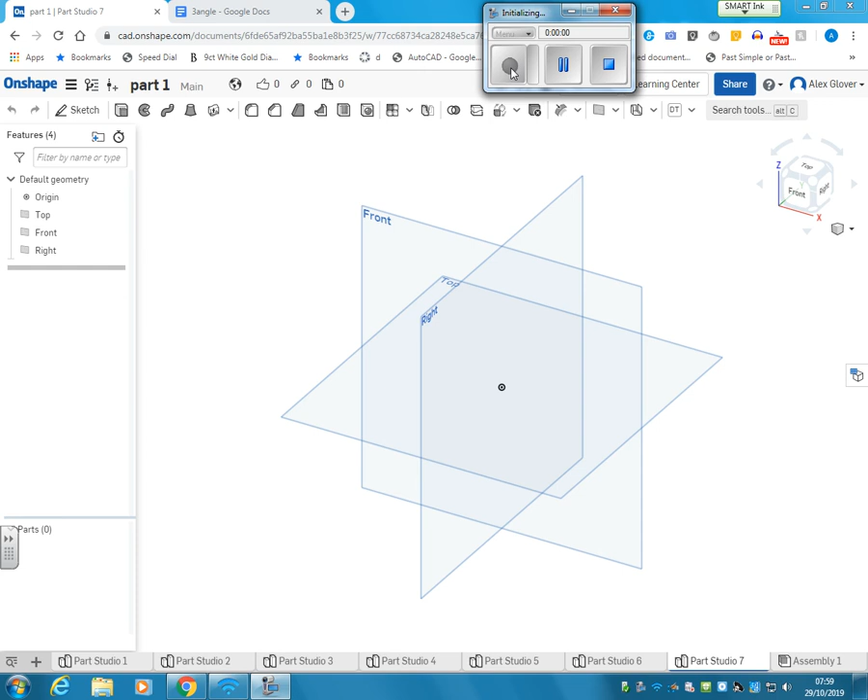Okay, so welcome to part 7. This is a bit more of a challenging part. First bit we're going to do is the slider plate at the bottom. This has constant cross section along a couple of ways, but it's probably got the most detail from the front view. So let's draw it from the front view.

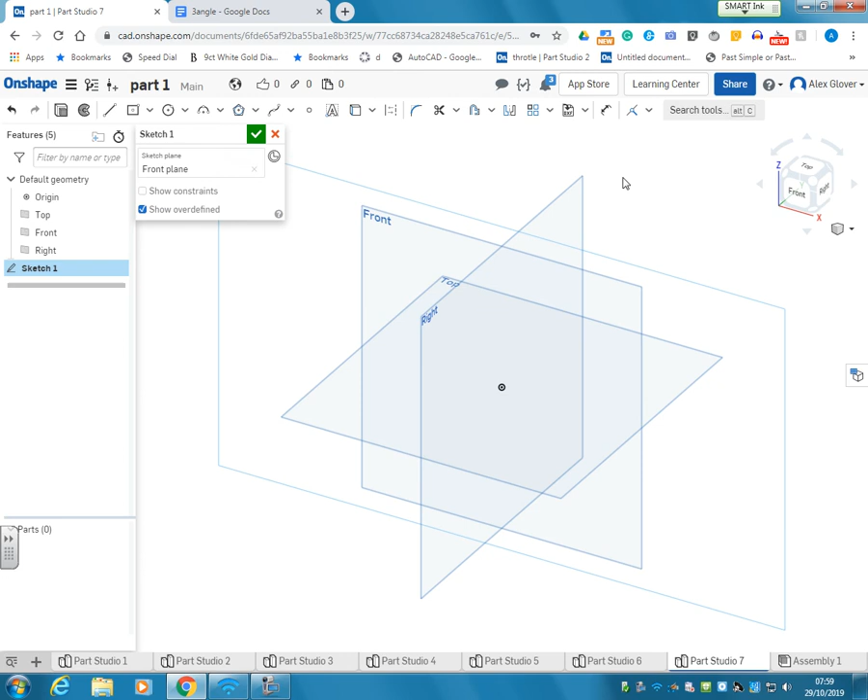We use this as a datum edge on the plane, and this has a line that is not symmetrical around the center, and then it has a circle here, with a diameter of 56, and then there's another circle inside because it's a hole, which is 34.

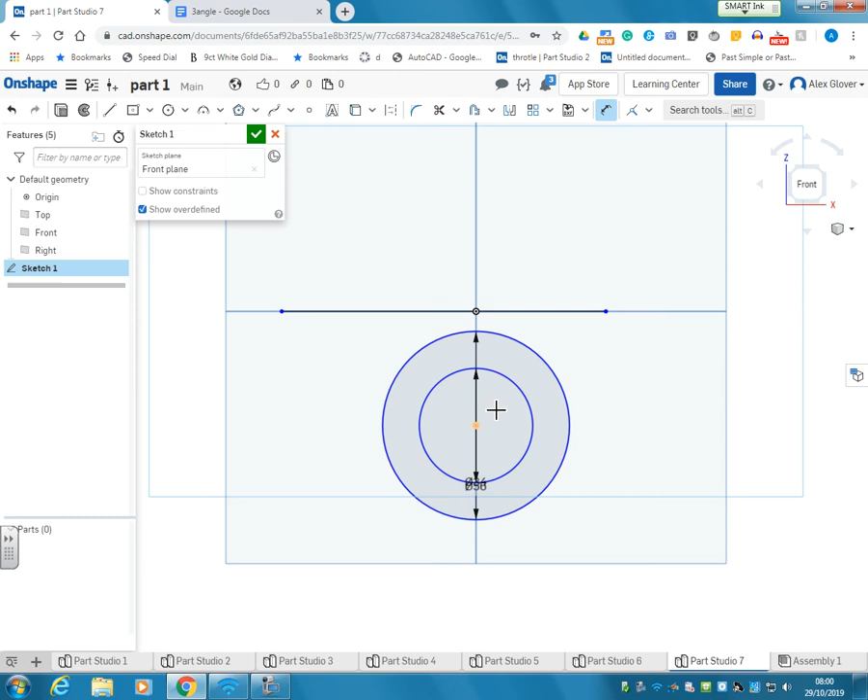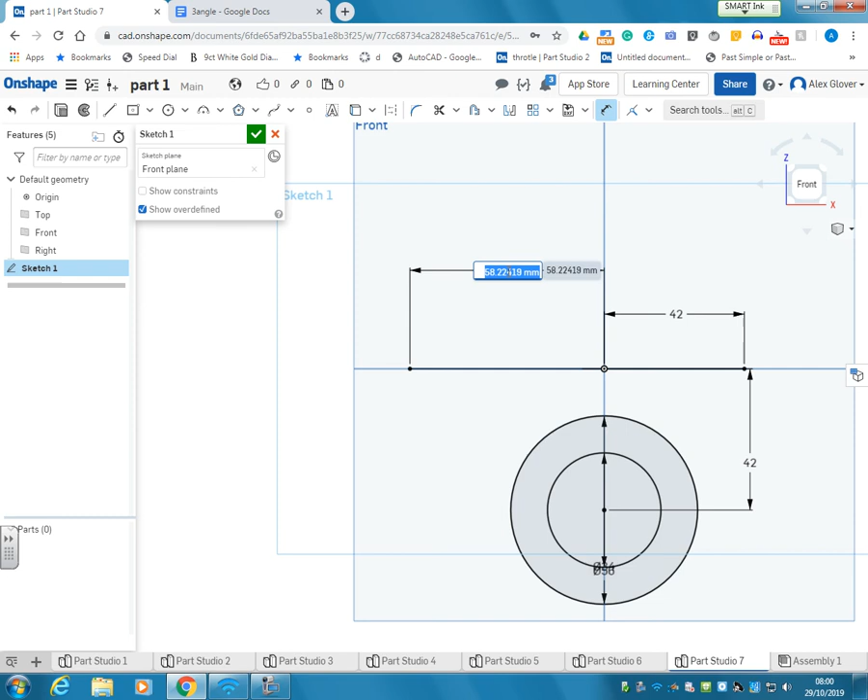Dimensioning that, 42. We also know that between there and there is 42, and that between here and the end point is 50 plus 73, which is 123. We know they link, and they have tangency.

And snip away the bits we don't need. Oops, that's wrong. I've missed a couple of edges bits out there.

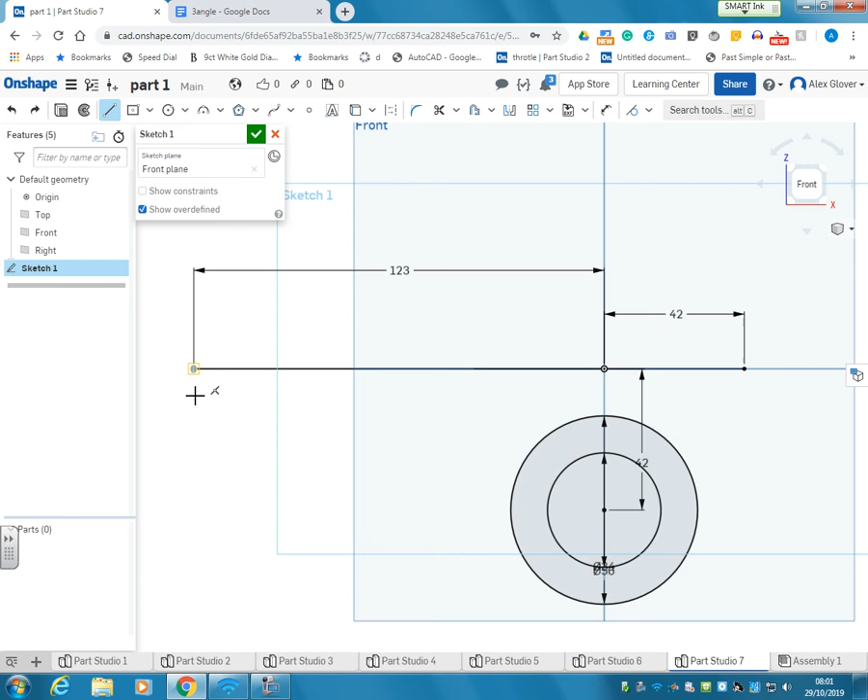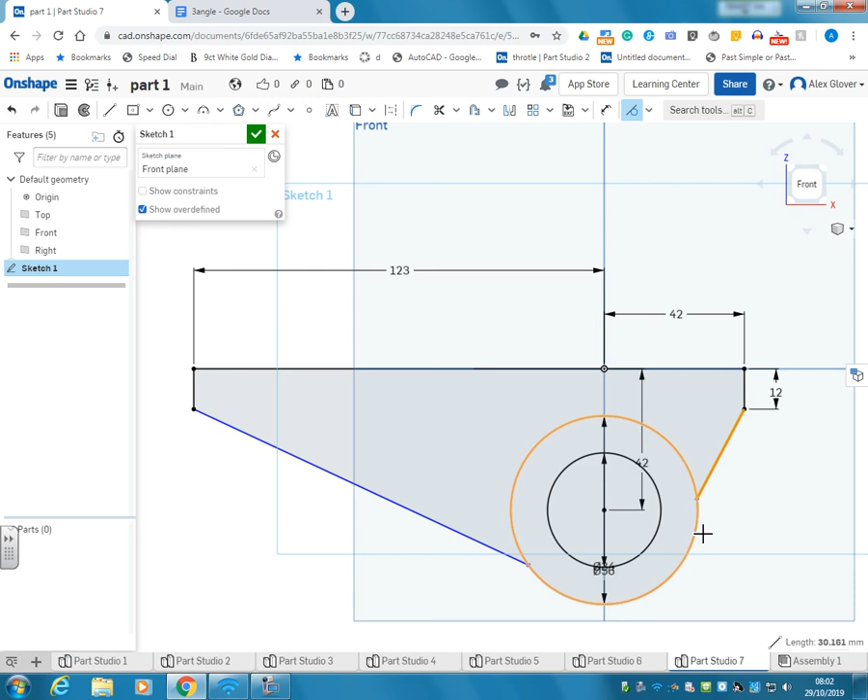Now, I think that these have probably been designed to be equal, so this length and this length, and the dimension is 12. Both move together now, and these are definitely at a tangent to this, and then remove what we don't need.

We can then extrude that symmetrically. Its total width is 66.

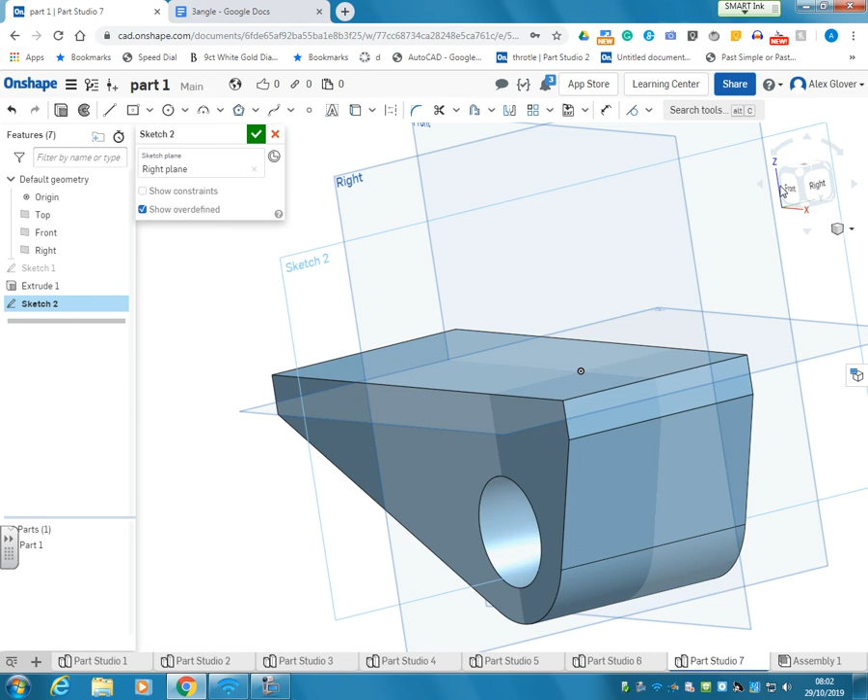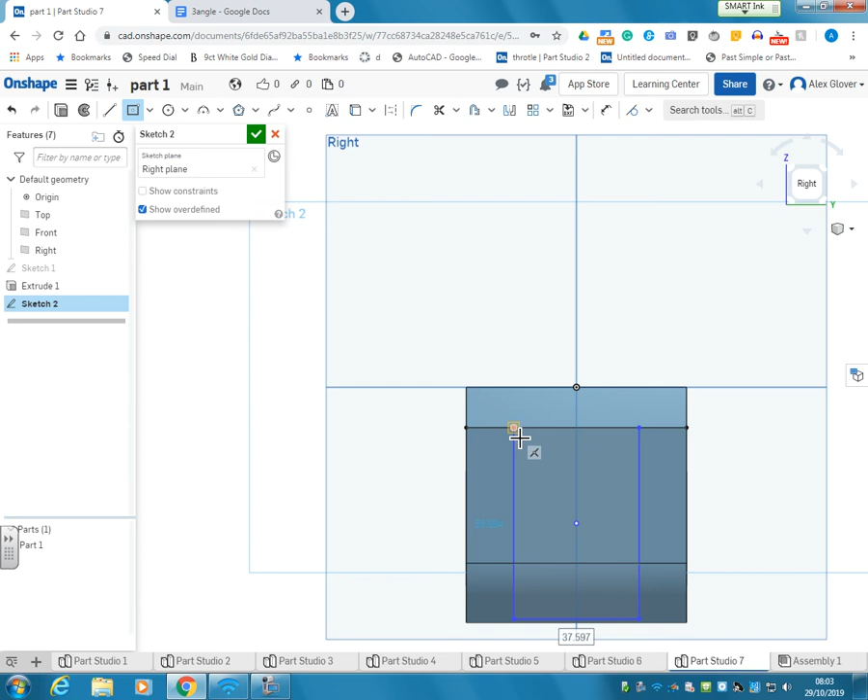Next step, sketch on the right plane. We need to remove this material. We can actually use that line there, and then center it off there. The width of this is 42. Height doesn't matter as long as it's bigger, so we'll go with 80.

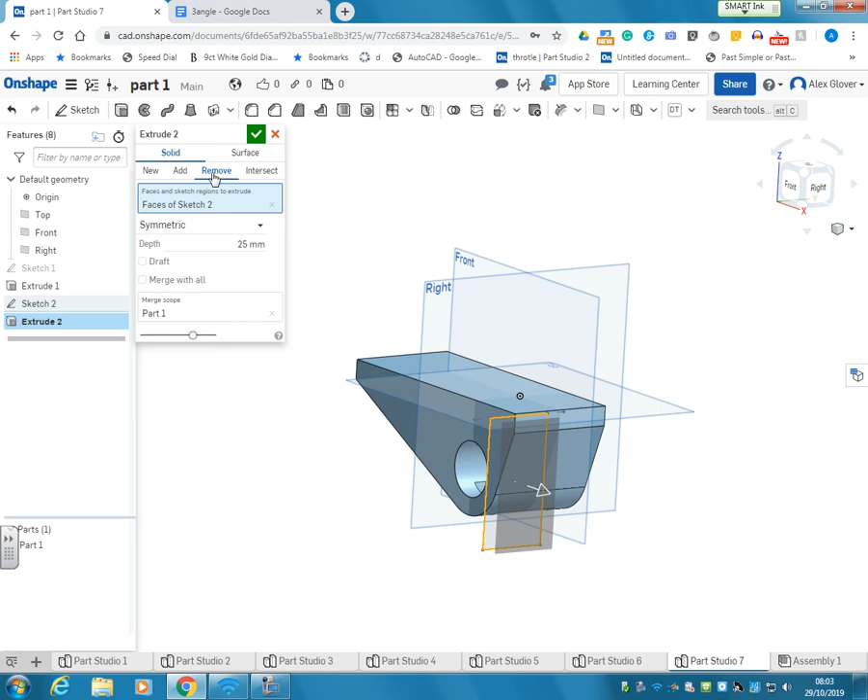And then extrude symmetrically, sketch 2, remove, drag it way through it. That's our part there. Next bit is this bit on top.

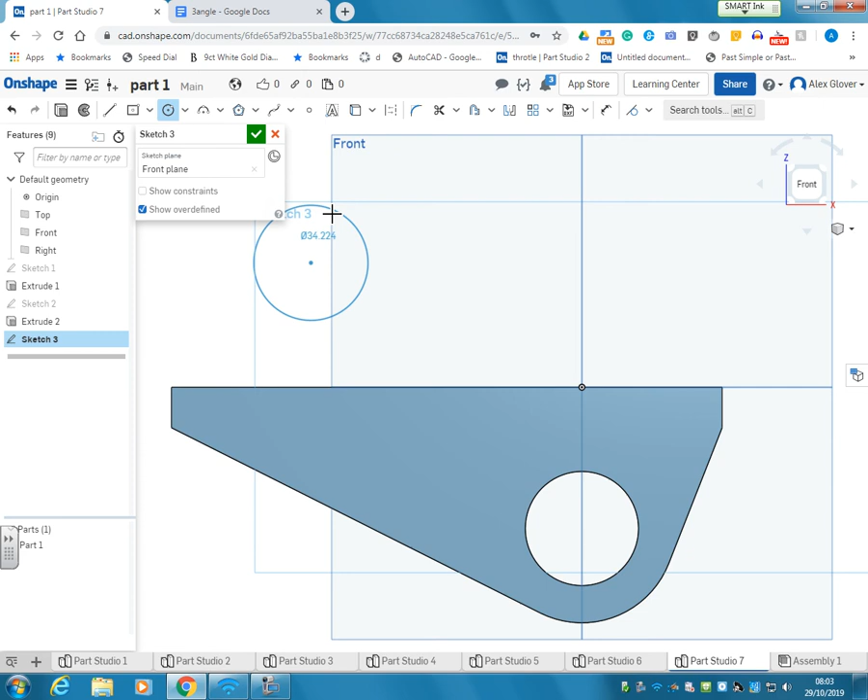So as we've done before, we're going to need to create another plane in a bit. But first, on the front plane, we're going to draw the very biggest circle, which is a diameter of 48, and then inside there we've got a diameter of 20. We'll draw the shoulder feature in later. Extrude that symmetrically. Its width is 55.

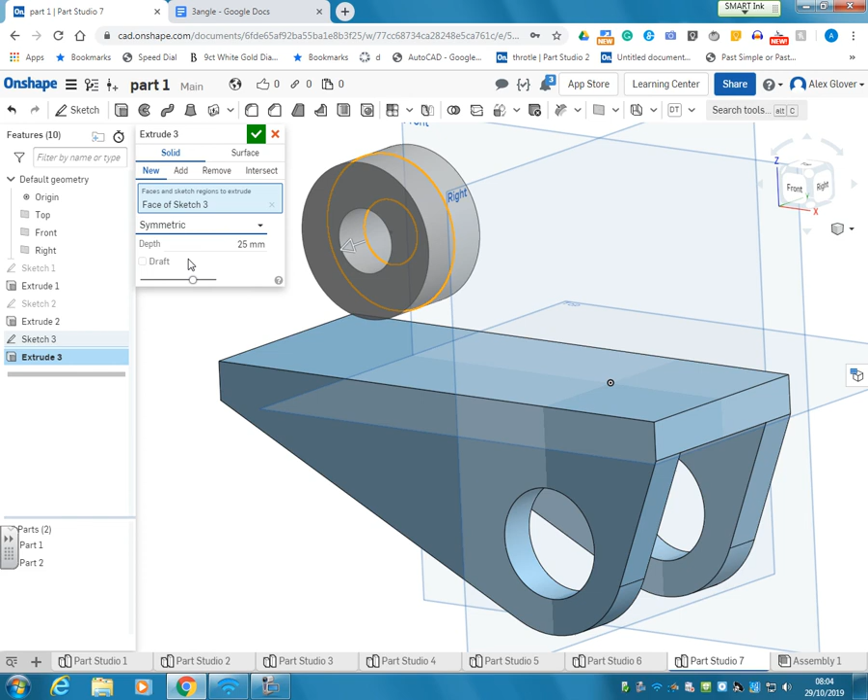Okay, now it's a different colour because they're different parts, but we'll union those together. So the two rib features that are going to sit around here and here are symmetrical around this plane, so we're going to only need to draw one, but it is offset.

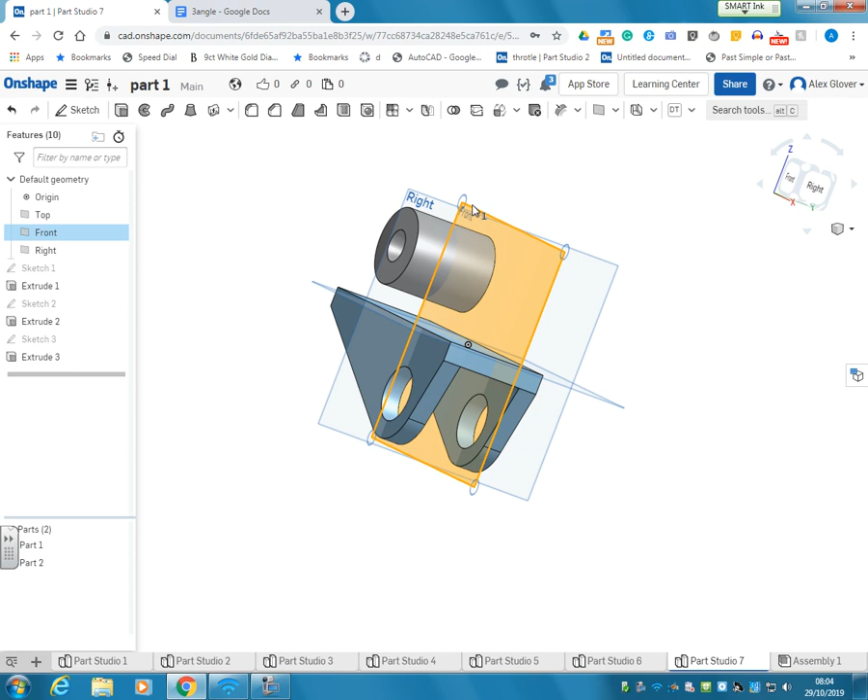So we're going to use this plane, offset it, and we're going to offset it by - well, it says there's 19mm between the two ribs and then 9mm, so altogether between centres is 28 between centres, so halfway there is going to be 14.

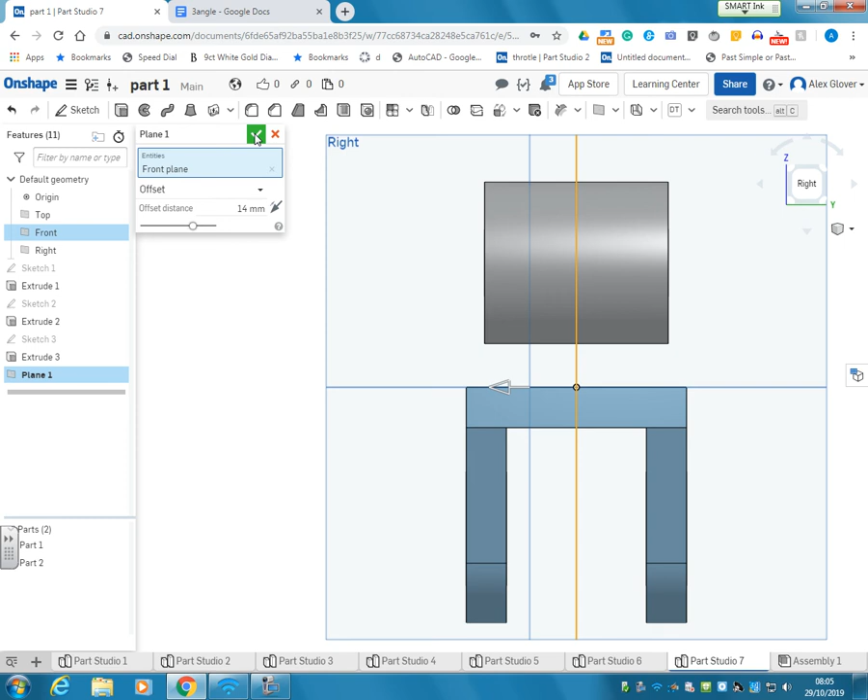Okay, so there's our plane. So now we're going to sketch on plane 1. We're going to use this, and then draw a line from here to here, up to there, and down. Remove that one.

So length of this line is 66. May have to draw a construction line here. Not necessarily. So the centre of that's going to be 50 in. So this is 17 from here to here.

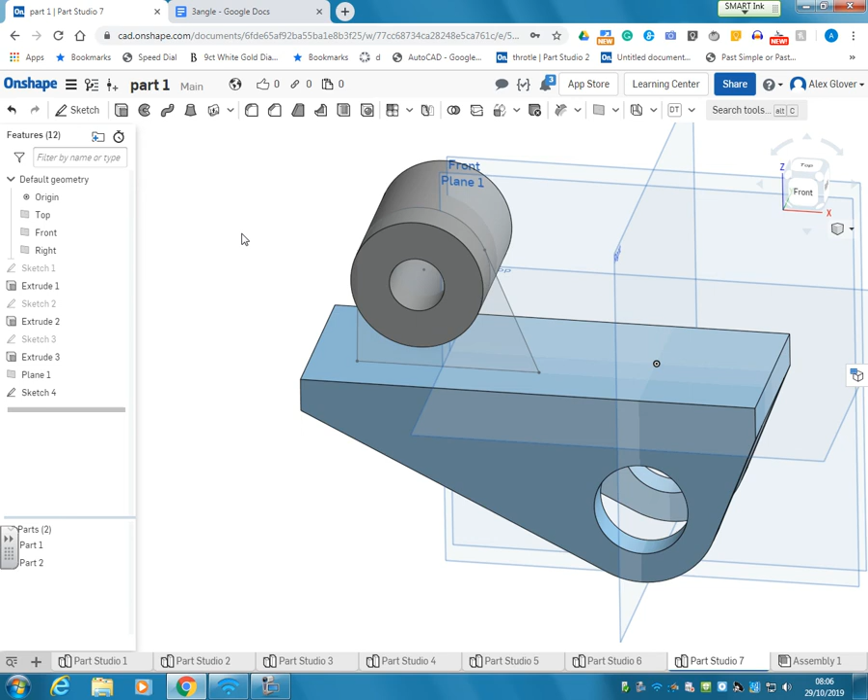Oh, okay, the reason is we've not positioned this correctly, have we? So go back to that previous sketch here. It's blue, we can see there because we've not positioned it. But its height from here is actually 45, and its distance from the edge, from there to there, is 50.

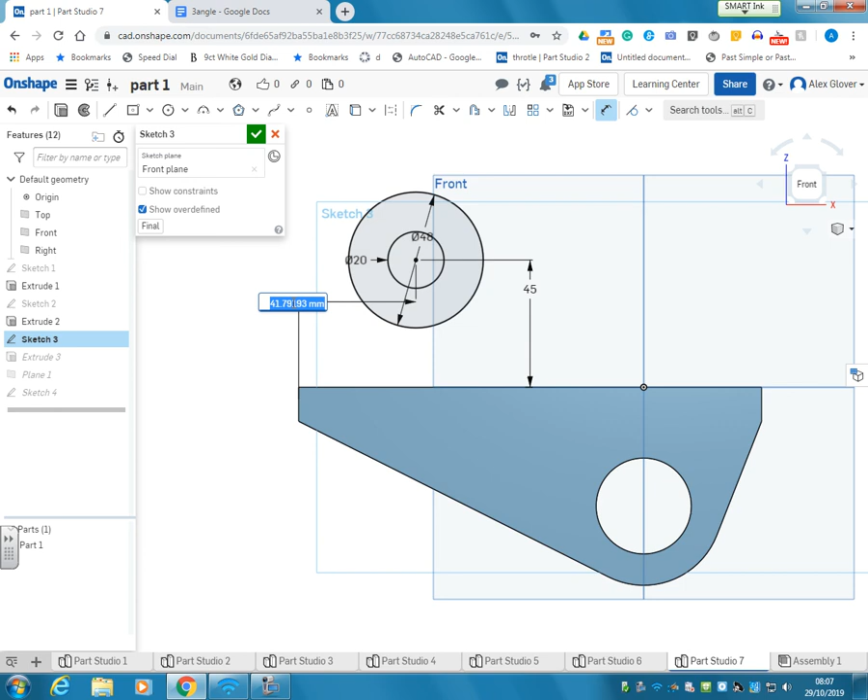Now when we go back in, our sketch now is symmetrical, that works okay. Now we can extrude that feature. I think they're only 9mm wide. And they're symmetrical around the plane we just made.

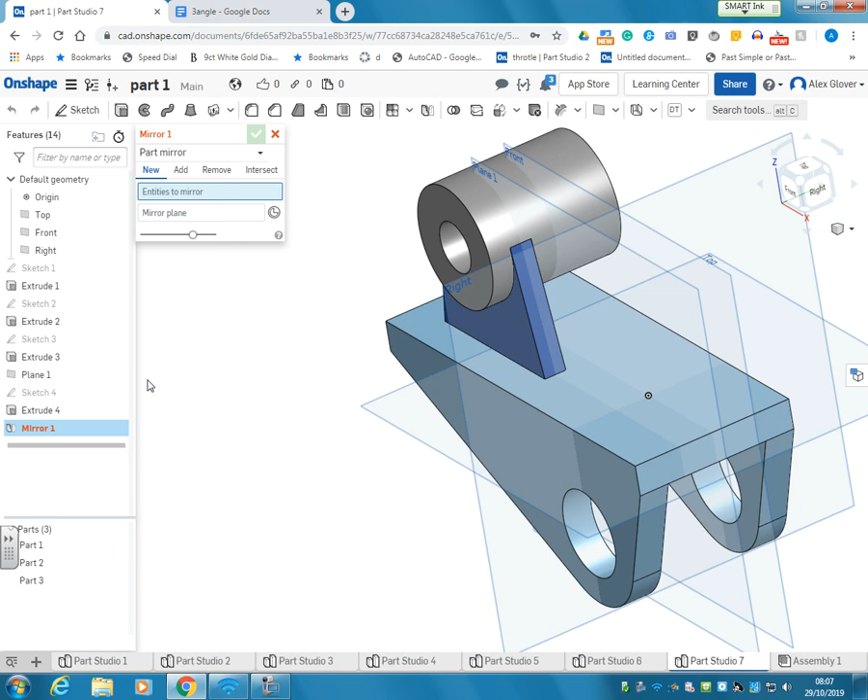Okay, now we can mirror that. So mirror, part 3, mirror plane is the front plane. There they are. Use Boolean to union all of them together.

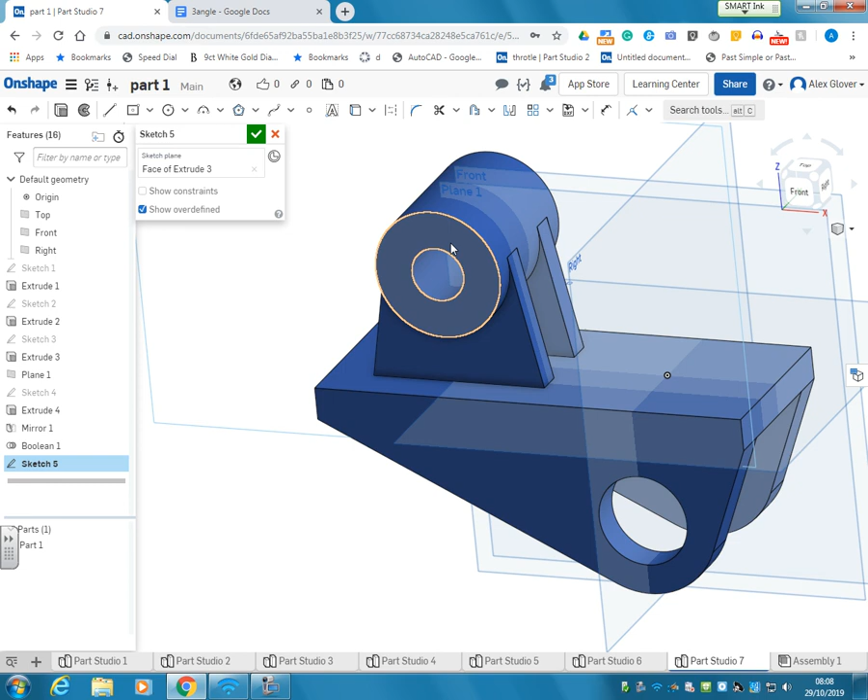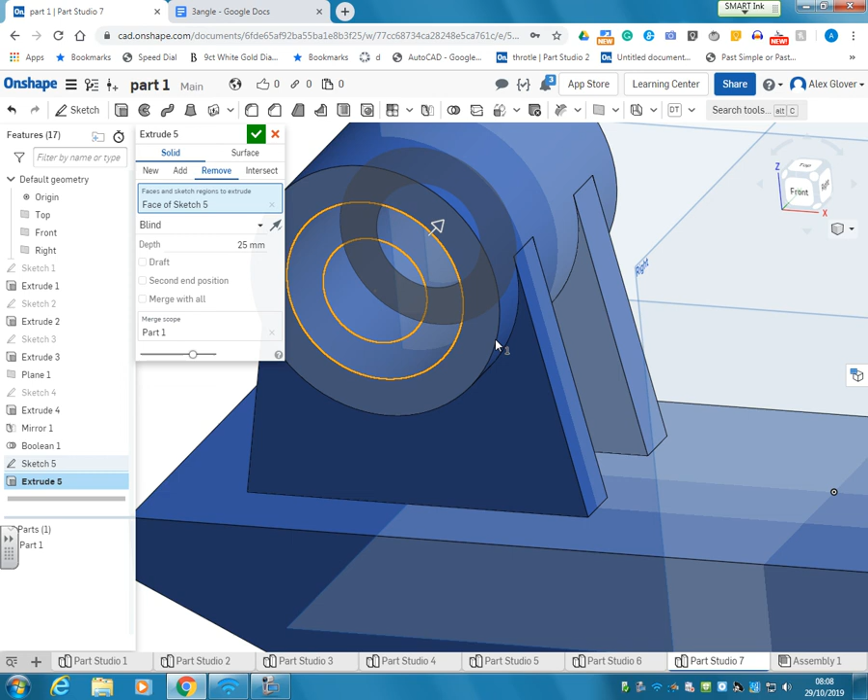Okay. Now we need that shoulder feature on here. So we'll use the inside circle and then create another circle that is 34. Okay, extrude, remove that, and it goes in approximately 5mm, I think. Yep, 5mm.

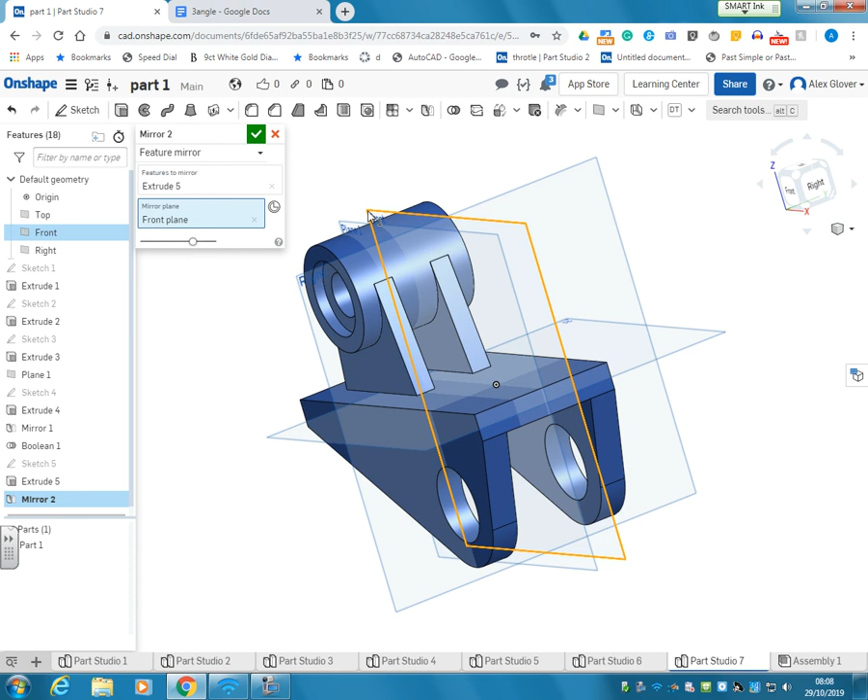Don't want to draw that twice, so we'll mirror. This time it's a feature mirror, not a part, because it's a feature. That extrude feature, and the mirror plane is there. Oops, mirror plane. There, it's done on both sides now.

Last section is to draw in this slot. So sketch on that plane on top. A construction line. Dimension it. Says the edge is 24mm from there. And it is 36mm long.

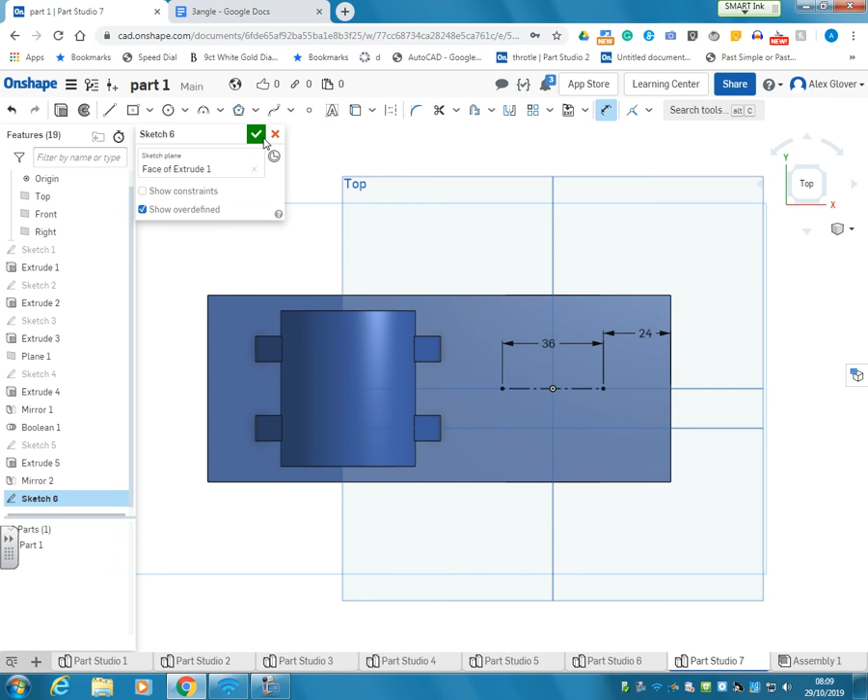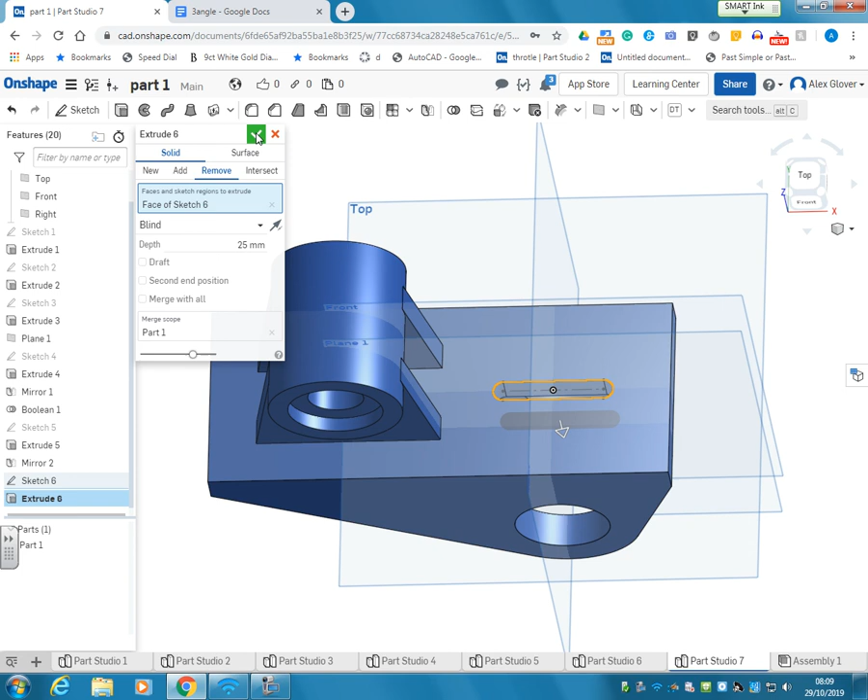And we'll use the slot feature, and we know the radius there is 7. Okay, we can extrude and remove that, and then we are done.